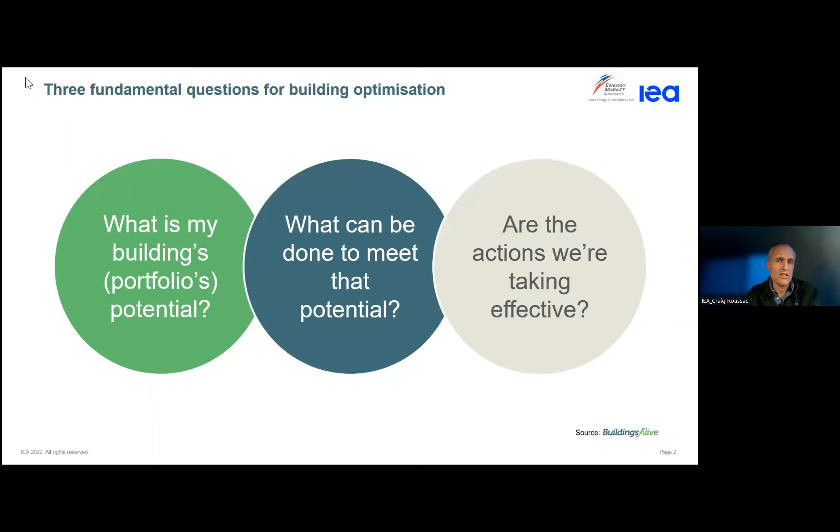I'll just start quickly with Buildings Alive, which works with owners and operators of commercial buildings, institutional buildings and so forth. We focus what we're doing on three fundamental questions. Using data science, we help understand what the optimization potential of a building or a portfolio of buildings is. Having identified what that target might be, we identify actions to address that target through efficiency and demand management strategies. And then thirdly, we measure and verify what actions we're taking and whether they are effective or not.

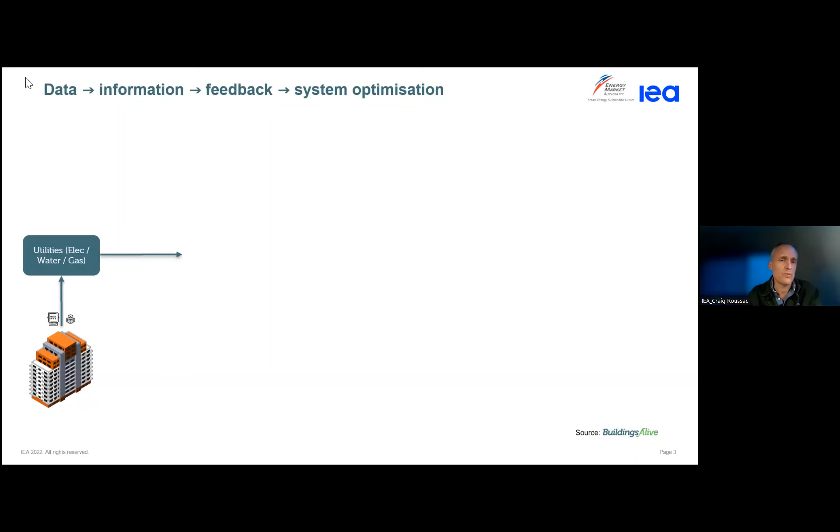So, building on what Stephen has just said, the approach here for an effective demand side, behind the meter storage approach starts obviously with the building and tapping into the data that's typically used just to generate bills. The most reliable, incontrovertible source of energy data would typically be what generates electricity bills, but tapping into that through smart meters, tapping into weather data, which can point to opportunity, to what the loads might be on a building and what work a building has to do, and other information such as occupancy data that can point to load.

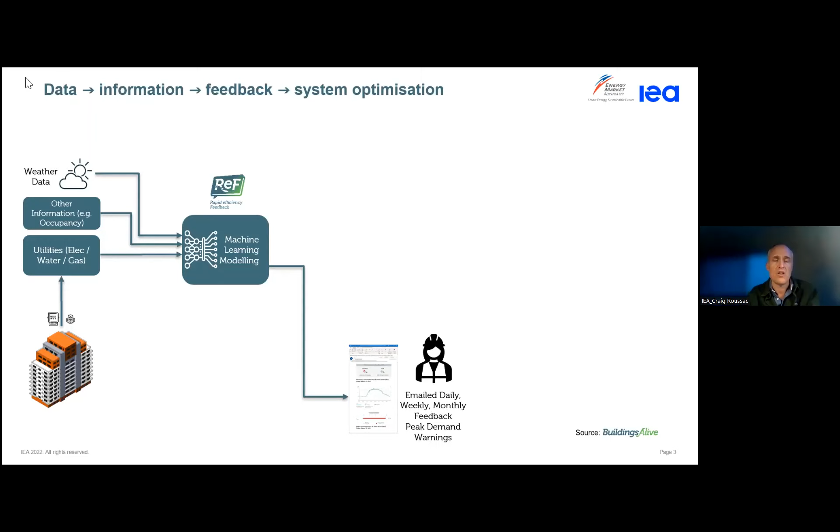Feed that into machine learning modelling technology that can then form a judgment and provide daily, weekly, monthly feedback or forewarning to the building operator on how the building might be performing. Provide the facility to drill in further to see that in more interactive ways. And then, as Stephen was saying, for the owner of the building to be able to evaluate on a semi-regular basis how the building's performing.

The level beneath that, which can be where the problems begin in terms of technology access and so forth, is the sub-metering level. From that, though, if you can access sub-meters at the building level, you can find a lot of deeper insights and feed that into the same learning and modelling. Building management systems, building management information systems, building management control systems, Internet of Things data can also be used to generate virtual meters or fine-grained insights that can further explain how buildings are performing and what the opportunities are.

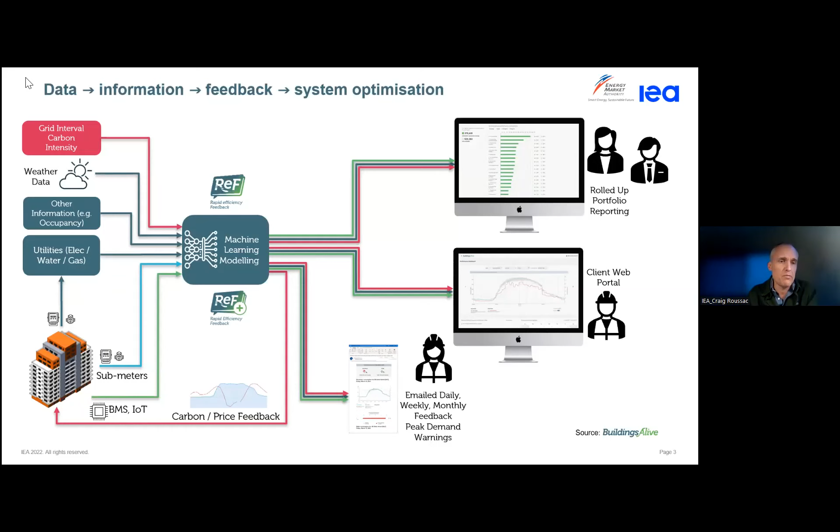What I want to focus on here is this final piece of the puzzle, what we're calling grid interval carbon intensity data. What we're talking about here is the time varying carbon intensity of the electricity system, which reflects the increasingly variable generation mix, and feeding that into the models to provide feedback to tune and optimize the building. So why is this important?

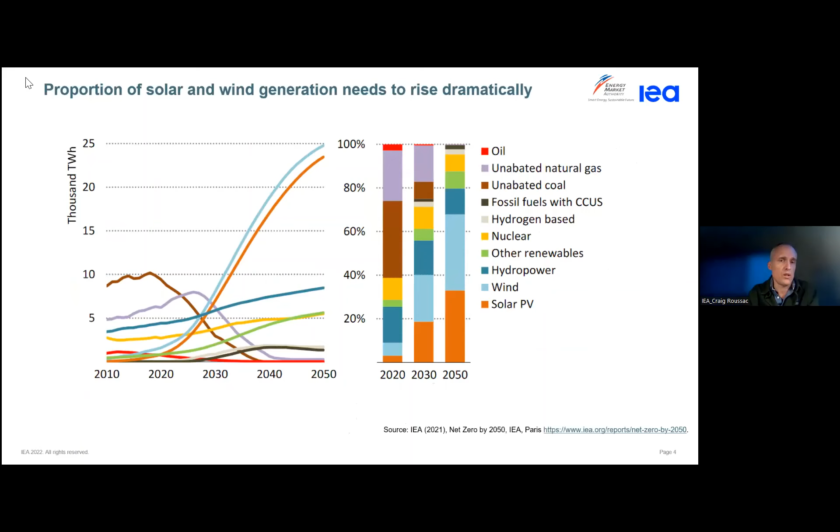Well, as no doubt everyone's heard over the last couple of days, the global electricity system really needs to shift rapidly from one that's dominated by dispatchable sources of energy to non-dispatchable sources of energy, such as wind and solar, which are clearly cheaper and more abundant in many places. As that happens over the coming decades, the role of different components in a much more complicated energy system just becomes clearer.

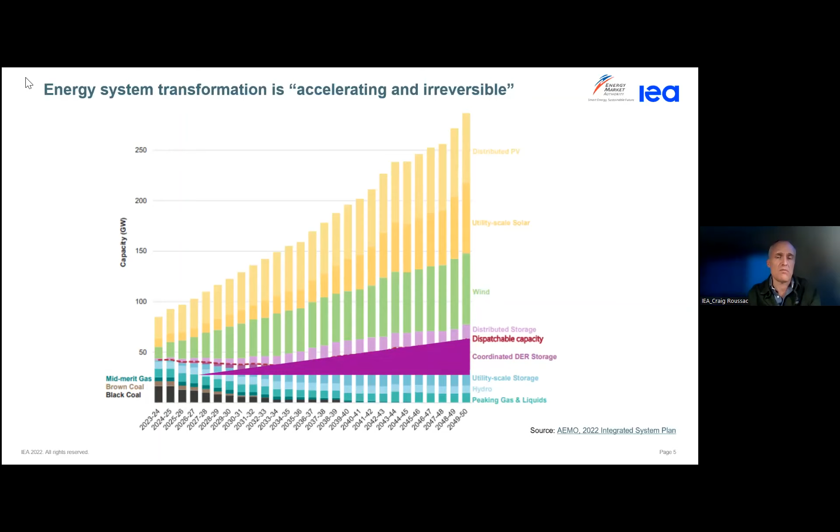Also released last week was quite an important document that you might want to have a look at. The Australian Energy Market Operator released its Integrated System Plan update to 2050. What I found very interesting in this is not just the rapid growth of generation capacity projected from wind and solar, but the measures to try and maintain stability on the system, and particularly this purple wedge that you see here. As we're moving away from coal and gas, this Coordinated Distributed Energy Resource Storage becomes roughly 50% of the dispatchable capacity on the system in a few decades' time, from virtually nothing now.

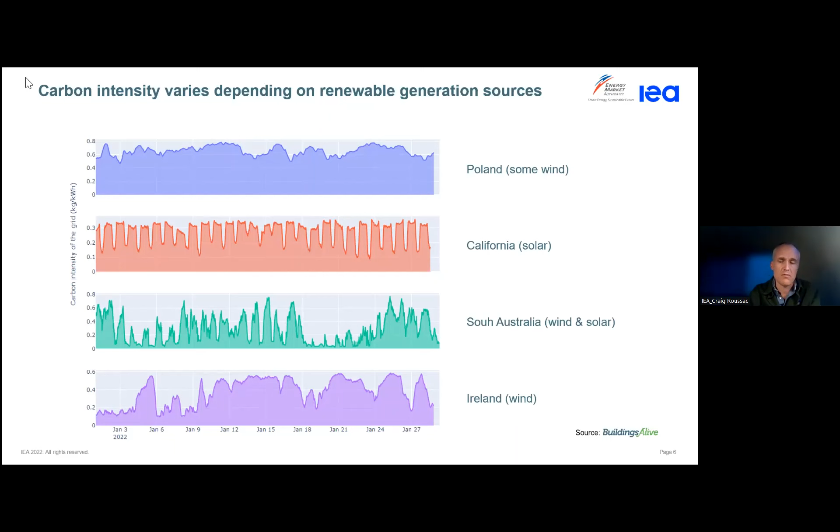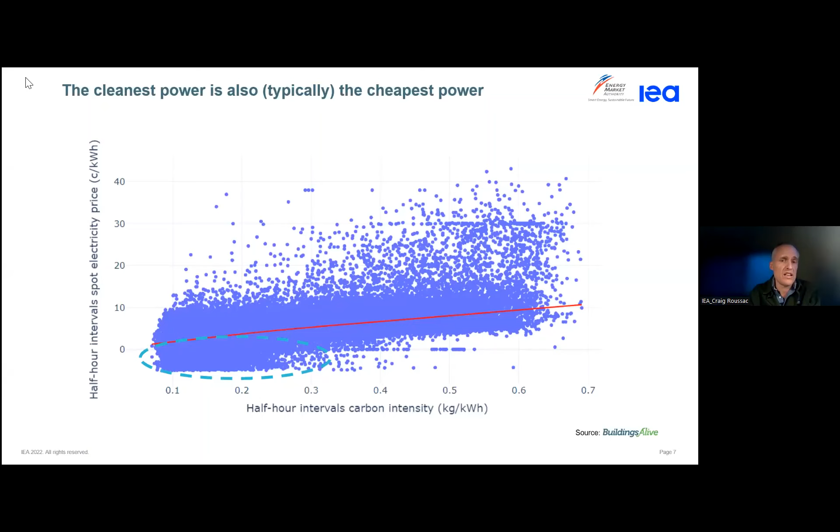This is due to the fact that demand on most systems currently is very unresponsive to wholesale price. Building operators are not seeing the wholesale price and therefore not responsive to it. So if you've got an oversupply of electricity from an abundance of wind and solar on the network, the wholesale market price drops. Without a commensurate change in demand, the price goes negative, which represents an interesting opportunity for buildings, not just from the point of view of providing support for the grid and the system operators, but for the building owner operators themselves.

This was really brought into stark relief last year when the South Australian electricity grid, or the component of the Australian market, actually averaged negative price on the market, moving from where it was at $40 a megawatt hour in 2020 to averaging zero or below zero between 9:30 in the morning and 3:30 in the afternoon every day. That was largely maintained throughout last year, and it even exhibits this when we're in the midst of a global energy crisis. Not quite as low, but still.

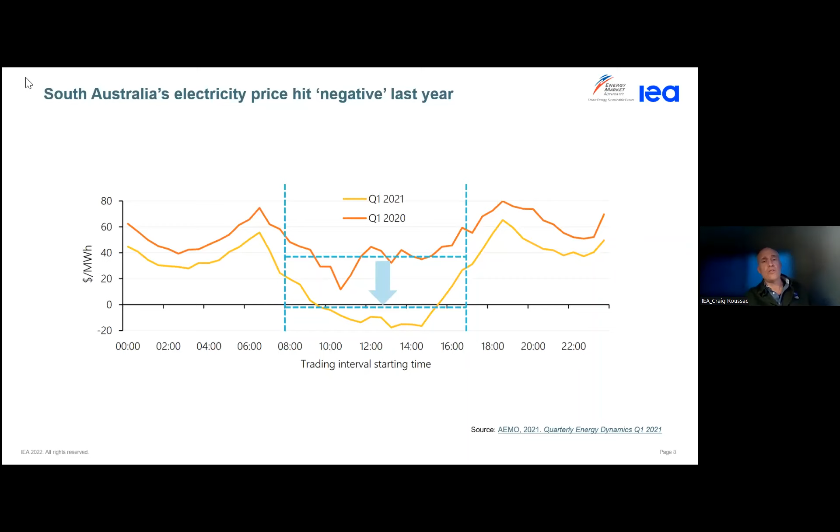So what that would mean, if a building owner was able to access electricity directly from the wholesale market, is the cost of their energy dropping from $40 or so to virtually nothing for the typical operating hours of an office building or an institutional building. So clearly a huge opportunity for building owners if they were to be able to tap into that.

So a static emissions factor multiplied by a certain amount of energy use is just simply not a true reflection of what the greenhouse gas emission impact of a unit of electricity actually is. If you shift to here, this is the New South Wales, so Sydney and the state New South Wales electricity grid. It's also quite interesting. Clearly a lot dirtier in the sense of a lot higher carbon emissions, but the real-time emissions are well below that static emissions factor. And what that's illustrating is another problem with static official emission factors: they lag what's happening in the grid. Because solar electricity still receives a high price, there's significant growth in investment, and it means the official statistics are lagging behind.

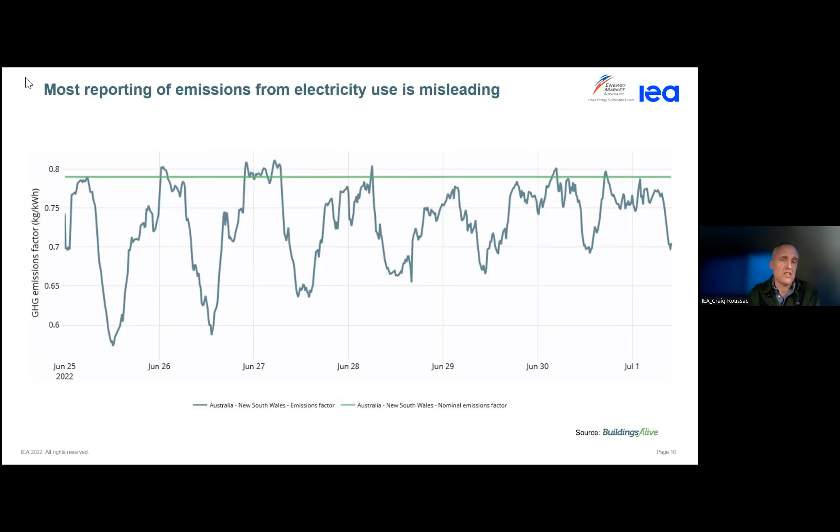So what does this mean in application? What could you do if you're operating a building, or what might you want to do if you were trying to incentivize a different type of operation of buildings? Well, here on this plot, I'm showing the blue line. This is the power consumption in kilowatts at hourly intervals for a building on the grid in South Australia, which I was just illustrating before. The red line is the carbon intensity of the electricity grid in South Australia. Now, what typically a building owner or operator would be doing would be trying to save energy during the middle of the day because that's when they use the most.

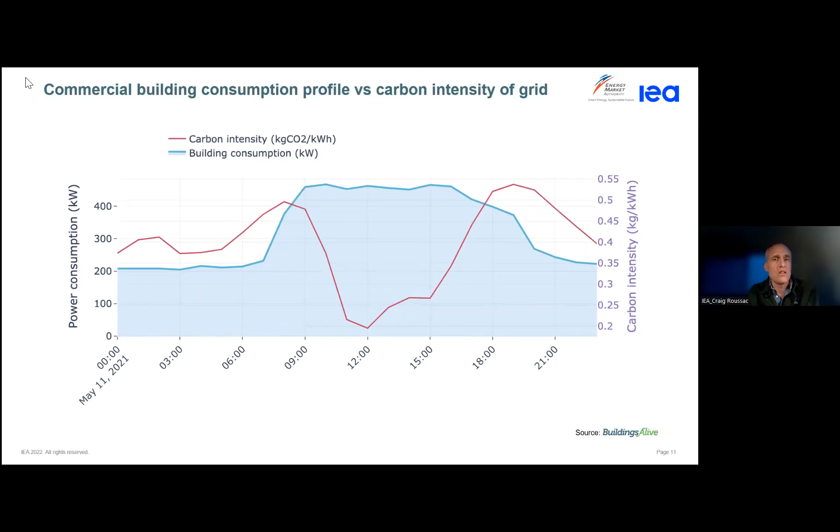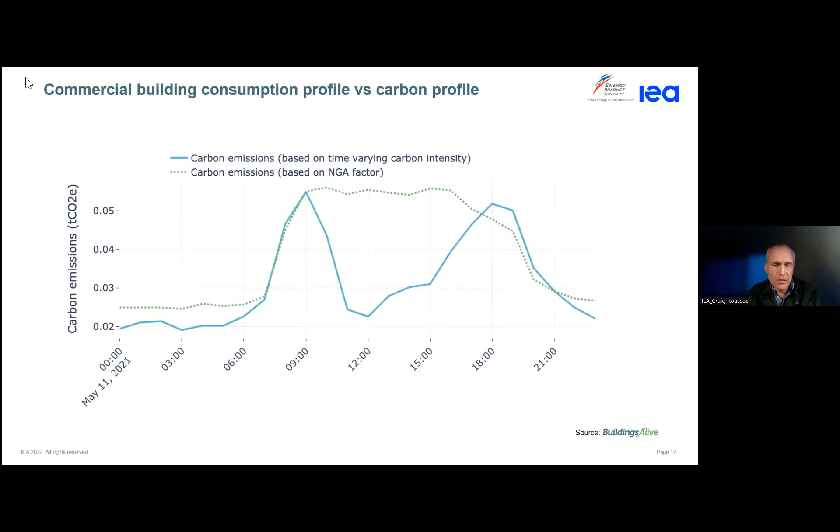But if we apply these two different factors, so what we call the National Greenhouse Accounts Factor, the static factor, obviously the carbon intensity of the building's operation just reflects its energy profile. But if we use the real-time emission factor, we see that during the middle of the day, the emissions are actually not that high. And so instead of having an issue so much in the middle of the day, you've got two peaks, one at the beginning and one at the end of the day, which would be much more worth focusing on in terms of environmental impacts, but also, because that's the way the wholesale price works, from a financial point of view.

I know I'm focusing mostly on Australia and particularly South Australia, but just to illustrate from a building in California, the same sort of story exists there, where there's been a significant growth in renewable energy investment, in solar. You see the dotted red line being the carbon intensity of the electricity supply. The building's consumption is reflected by the blue line, and the reality in terms of its true emissions is reflected

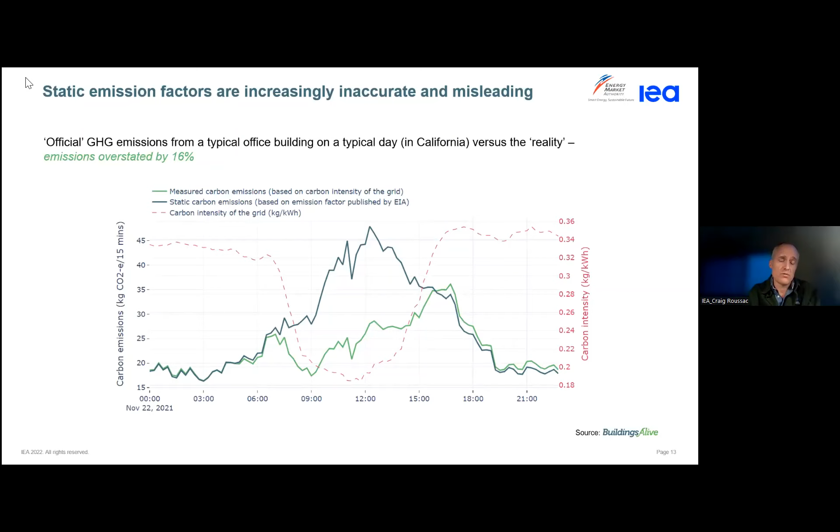by the green line. And so they're quite right to be shifting as much of their load as they possibly can to the middle of the day and achieving an actual emissions reduction of 16%, or put the other way, using official reporting factors, they would be overstating their emissions by 16%.

An example here of a building on a university campus, where they weren't so much interested in reducing the real-time carbon emissions, but rather shifting load to reduce capacity charges at the end of the day. So in this particular university campus, they pay a network capacity charge that's set based on the maximum demand from 2 p.m., so 1400 hours, to 8 p.m., 2000 hours.

I should just point out a couple of other aspects of this graph. The columns here are the carbon intensity, which you'll be picking up now. The machine learning model predicted under this summer's day, the demand profile would follow something like the green line

here. But what they did is they lowered a temperature set point on the building by 1 degree Celsius at the beginning of the day and maintained that through to 2 p.m. So effectively forcing the plant to work a little bit harder up until 2 p.m. So they achieved what they were hoping for in terms of a demand reduction measured during that window of 2

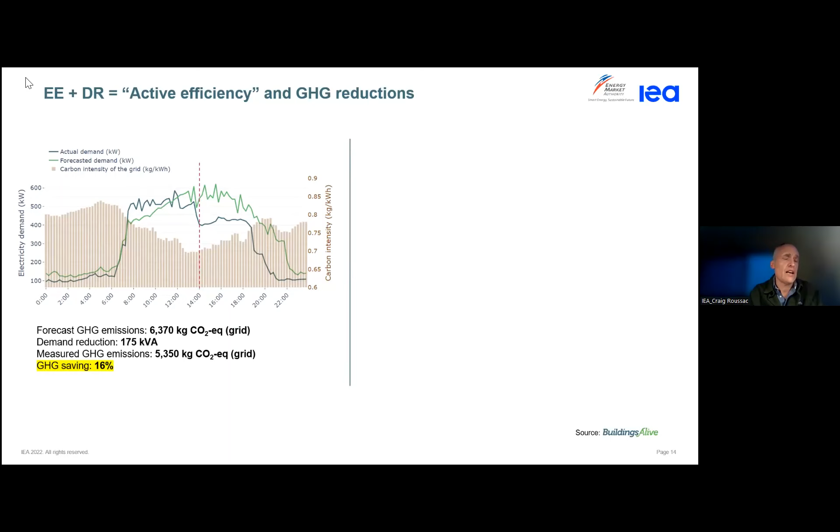till 8 p.m. But interestingly, they also achieved a greenhouse gas emission reduction of 16% by effectively being able to run the plant equipment more efficiently, shift load to some cleaner energy, and reduce the overall amount as well.

If we were to take that same action and apply it into a building that has a grid that looks more like the future grid that the IEA is talking about, so one that looks like South Australia's, which is overwhelmingly wind and solar, on a day where weather conditions were almost the same. So I've taken this building from one city and put it down in another city's grid. And the effect of that is really quite astounding.

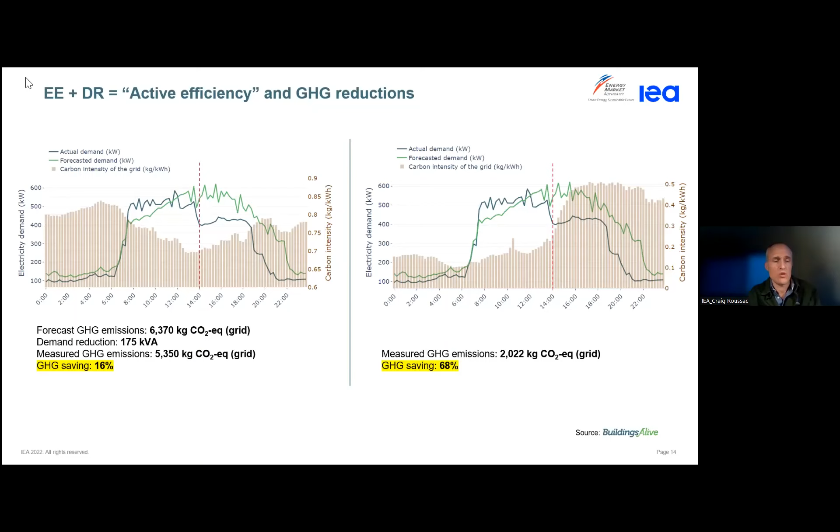When they had a windy morning, but not a windy evening, and obviously sunny during the day, the effect of that would have been a 68% reduction in greenhouse gas emissions. So really quite phenomenal. So just to wrap up here, just with another dimension for why, if we

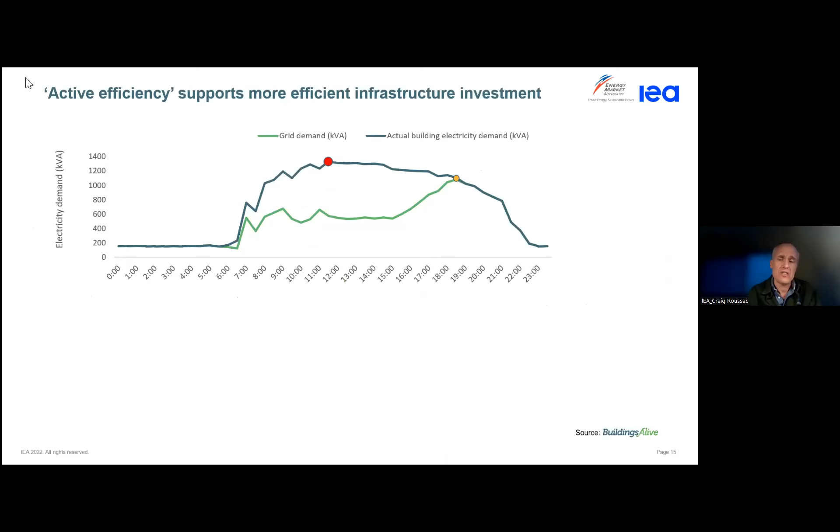thought of buildings as batteries and thought about charging and discharging the thermal energy in the building, or enhancing indoor air quality, for example, this is a large shopping centre with a very large photovoltaic array on the roof, almost 1 megawatt of capacity. And I think it highlights another really important consideration for electricity networks and planning, the fact that the infrastructure itself can be optimised greatly if we take a more dynamic and active efficiency approach.

The blue line here is what the building actually consumed in terms of electricity and what its demand profile looked like. The green is what the grid saw, because those solar panels are sitting behind the meter. Clearly, there's almost as much demand on the network, so the size of the cables, supply infrastructure had to be

designed to accommodate that. But if some of that load can be moved from later in the day and shifted to earlier in the day, not only would the emissions be reduced, but the system capacity, so the transmission and distribution infrastructure capacity, could be reduced as well, and more optimised.